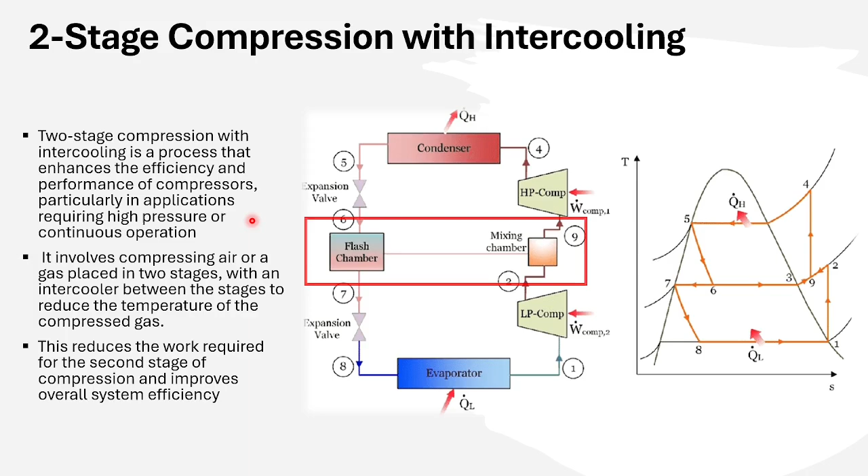So why do we use two-stage compression with intercooling? Here are the key advantages. Number one, increased efficiency. Cooling the gas between the stages means less energy is needed to hit the target pressure, cutting the power costs. Enhanced durability. Lower temperatures reduce wear on compressor parts like pistons and valves, so your system lasts longer.

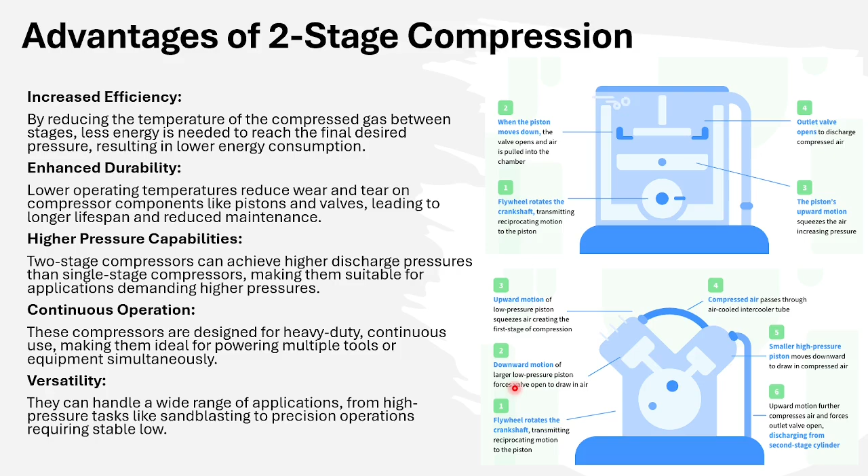Higher pressure capabilities. Two-stage systems handle higher pressures than single-stage systems, perfect for demanding applications. Continuous operation. These compressors are built for heavy-duty non-stop use, like powering multiple tools at once. Versatility. From sandblasting to precision cooling, they handle a wide range of tasks. So these are the benefits that make the two-stage system more efficient and reliable compared to the single-stage system.

The applications of two-stage systems. A two-stage system shines when there is a big pressure difference between the evaporator and the condenser. So here is where you will find it. Low temperature refrigeration. Just think of cold storage warehouses, frozen food plants, or fish and meat processing plants.

Industrial refrigeration. Systems needing evaporator temperatures as low as minus 40 degrees Celsius to minus 80 degrees Celsius, like chemical plants. Gas liquefaction. It is used for ammonia, CO2 or even liquefied natural gas, LNG, for the gas liquefaction process.

Cryogenics. Used for ultra low temperatures where multiple compression stages are required. Large scale HVAC. It's less common now but still used for extreme temperature lifts in big buildings.

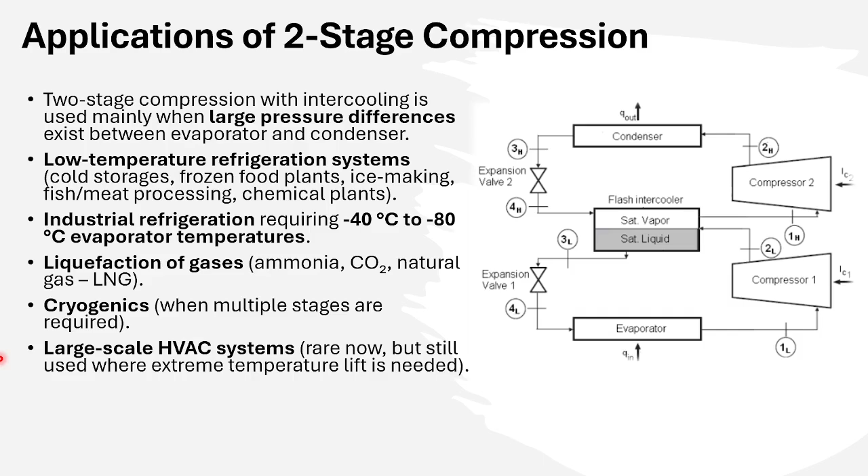So now let's dive into the refrigerants powering these systems. Regulations like the Kigali Amendment are pushing low GWP options. So here's what's trending. Ammonia, the king of industrial systems: it's low cost, super efficient, with zero GWP and no ozone depletion potential. You will find it in food storage and ice plants.

CO2, it's gaining traction in supermarkets and transcritical systems. It is natural, safe, and works great with intercooling setups like parallel compression. Hydrocarbons. R290, R600a, R170, that is propane, butane, and ethane, used for ultra low temperatures like LNG liquefaction. They are efficient but require careful handling due to flammability.

HFOs and blends. R1234yf, R1234ze, and R513A. These low GWP options are popping up in large chillers, improving efficiency in staged systems. So each refrigerant has its strengths, but how do they stack up in performance? Let's see in CycleD-HX.

So now we will move to our simulation software, CycleD-HX. We will open CycleD-HX version 2.0. First we will go to File and Open. Here we are going to open the example files which are already provided by the CycleD-HX simulation software. In the examples at the bottom you will see the refrigeration intercooling example with R32. Just click it and open it.

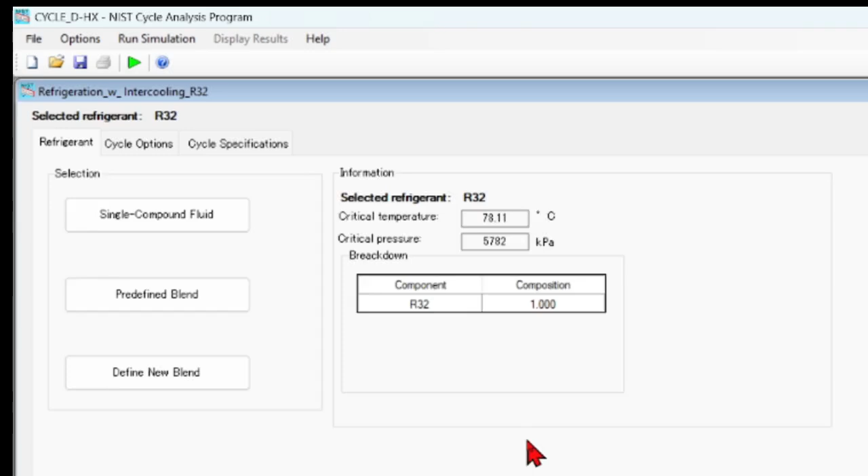This will load the file data, and here you can see it has already selected refrigerant R32. For the cycle option, it has selected two-stage compression with intercooling, and here you can see its diagram. An important thing is that you have to define the intermediate pressure, which is already defined as 13 bar or 1300 kilopascal. This intermediate pressure is a very important parameter for two-stage compression with intercooling,

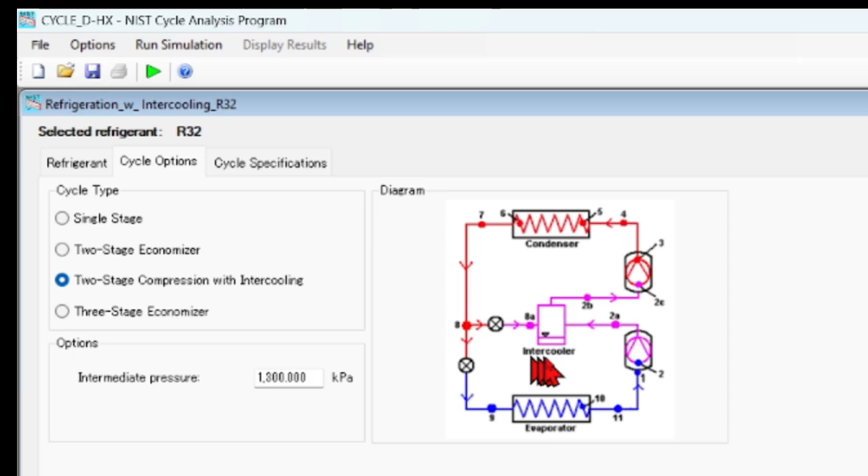because sometimes we vary it to check at which point we have maximum COP. So this is what we will also study in this video. In the cycle option you can see it has already selected the impose mode and delta T mode. First we will check the reference parameters and run it in impose mode so that it will impose all the geometry parameters.

Here we can see that the system cooling capacity is 12 kilowatts, and the vapor line pressure drops are assumed 0. Also the auxiliary power is assumed 0. And both compressors have isentropic, volumetric and electric efficiency of 100%. So now we will run it in impose mode first.

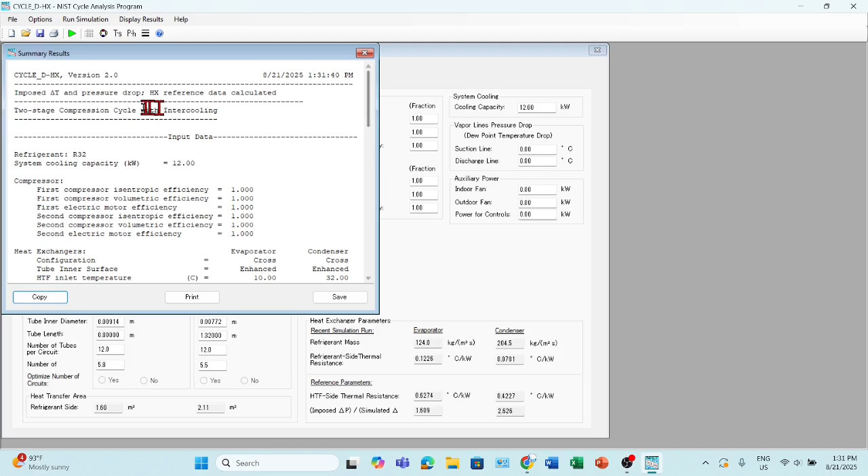Here you can see it has run in impose mode. Now we will move to simulate mode. In impose mode it has saved some reference parameters which it will use for our simulations. And now in simulation you can see some of the boxes are grayed out, which we cannot change. So now we will just run it in simulate mode.

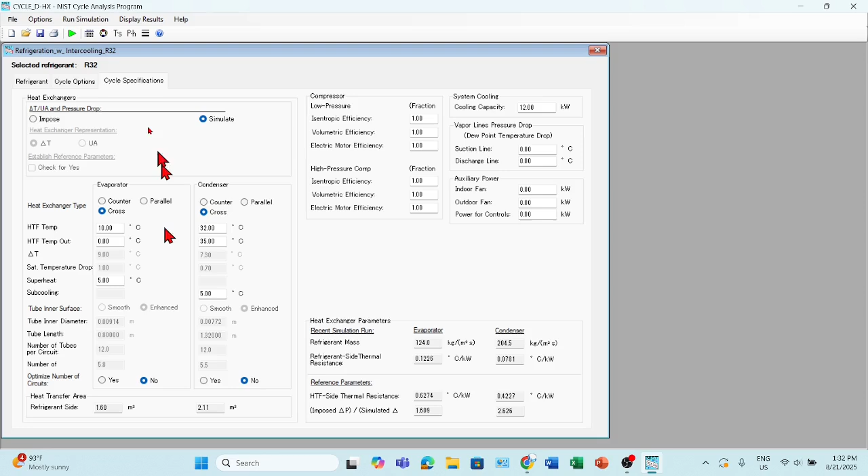So here you can see it has run it in simulate mode. Now what we can see, it has calculated the thermodynamic cycle results at all the state points, and it has calculated the compressor and system results. The important ones are the compressor power and the COP cooling and COP heating values, and also compressor suction volumetric flow rate values. And here we can see the heat exchanger results also.

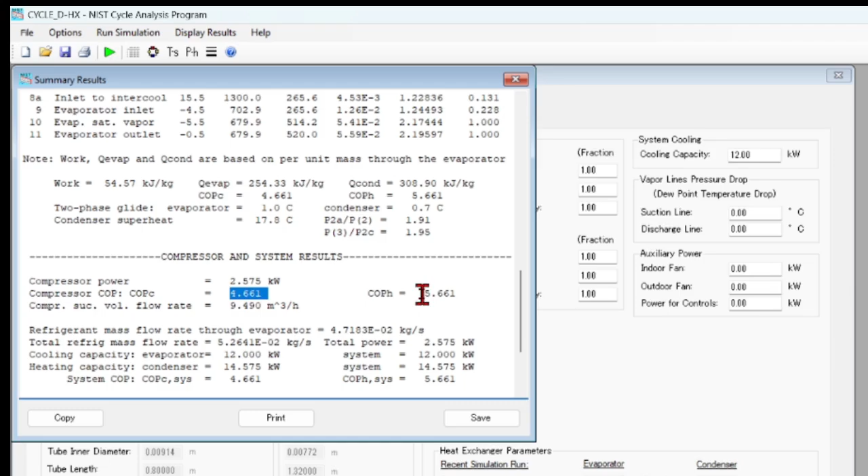So what we will do, we will just see what are the COP values, or can we improve these values or not. For example, here we can see the COP of cooling is 4.661 and COP of heating is 5.661. Now we have to see how we can improve these COP values. For this we will go and check the TS and pH diagrams. So for those diagrams you will just click on the TS and it will open the TS diagram, and then pH, it will open the pH diagram.

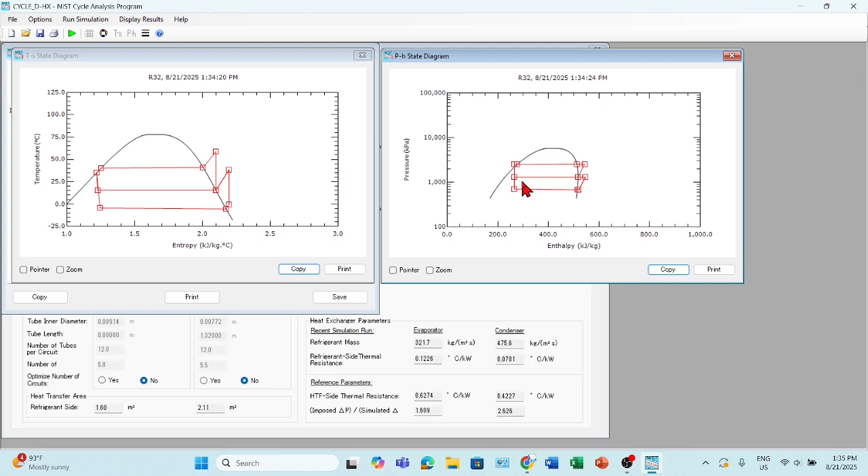So here in this TS and pH diagram you can see clearly that it has equally divided the pressure levels and the temperature levels in the two stages. So it should be the most efficient intermediate pressure points and temperature points. But let's see, while changing these pressure levels, how it affects the COP of the system. So we will just save the results of R32. We will name them R32 two-stage.

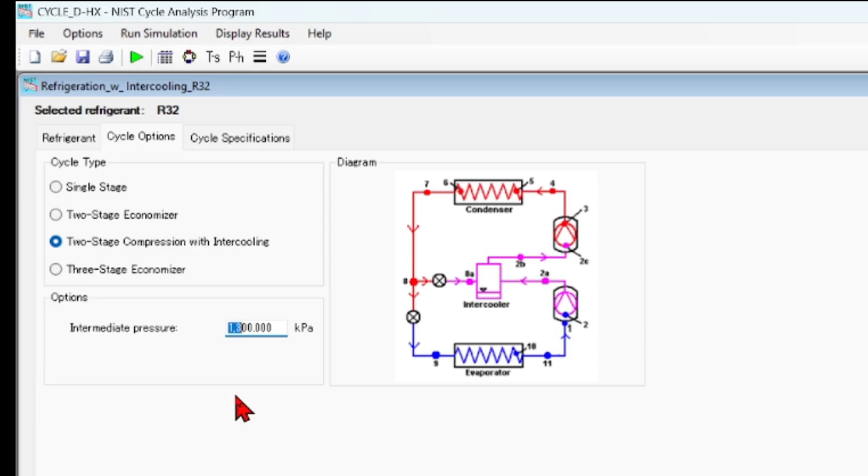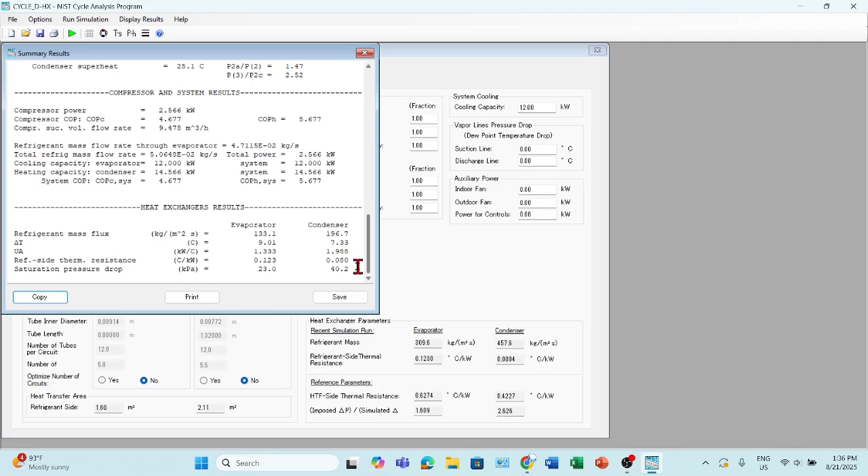Now we will go back to the cycle options, and here we can see that the intermediate pressure is 13 bar or 1300 kilopascal. Now we will just reduce it to 10 bar or 1000 kilopascal, and we will see how it affects our results. We will go back to cycle specification and then we will run this simulation again. Now here we can see the latest results. We will also save this file so that we can compare it with the previous results. We will save it R32 10 bar.

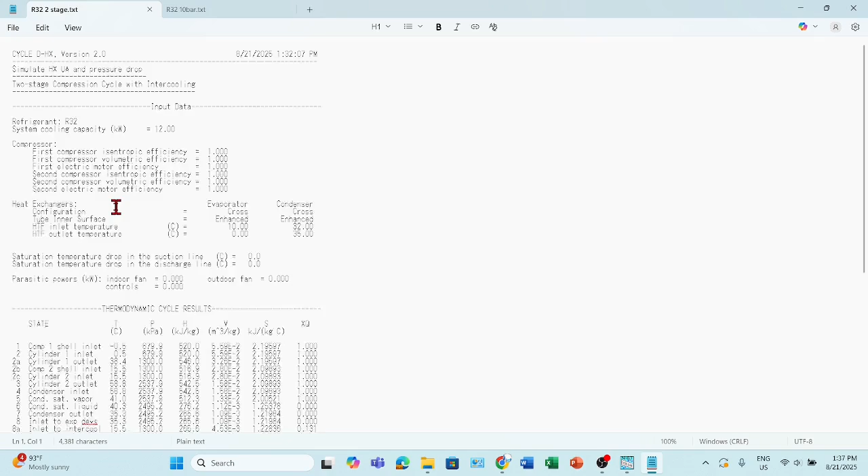Now we will just open and compare these results. So here you can see when we run it at 13 bar, we get the COP cooling of 4.661 and COP heating of 5.661. When we change the pressure to 10 bar and then we run the simulation again, then the COP of cooling is 4.677 and COP heating is 5.677. So you can say that the COP of cooling and COP of heating has improved by decreasing the intermediate pressure.

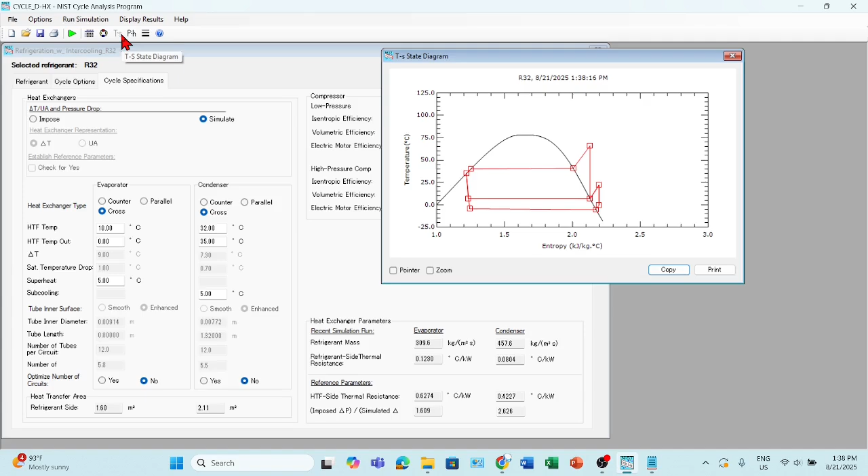So this is how we use the two-stage intercooling compression cycle, and usually we vary this pressure level to get the maximum COP of the system. Here you can see that when running it at 10 bar pressure, it has not divided the two stages equally. We can see that the temperature levels and the pressure levels are not equally divided. This means that on the second stage of the compressor, there is more load as compared to the first stage of the compressor, which is not desirable. So this is how we have to do optimization between the optimum intermediate pressure and COP of the system.

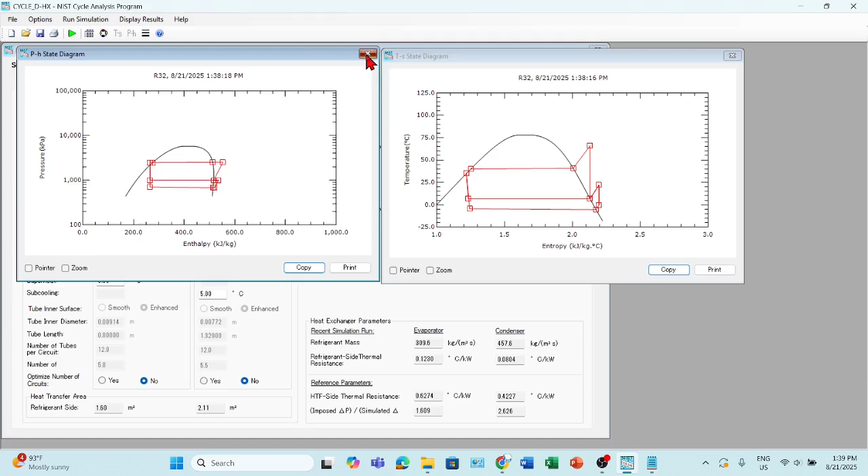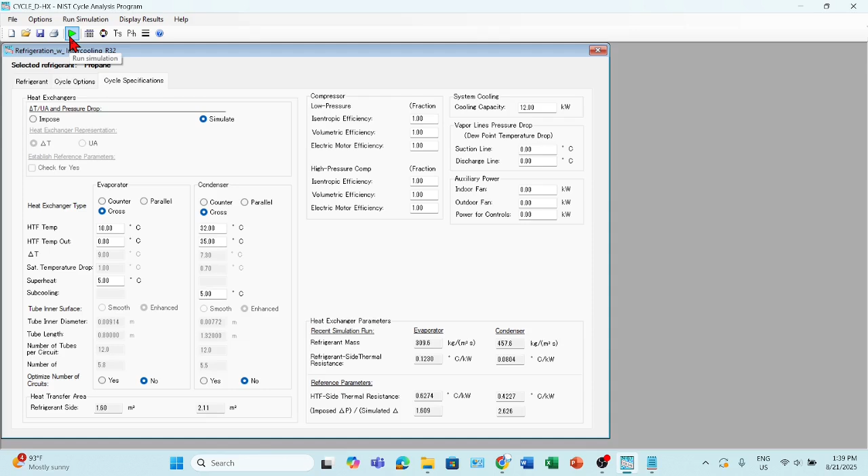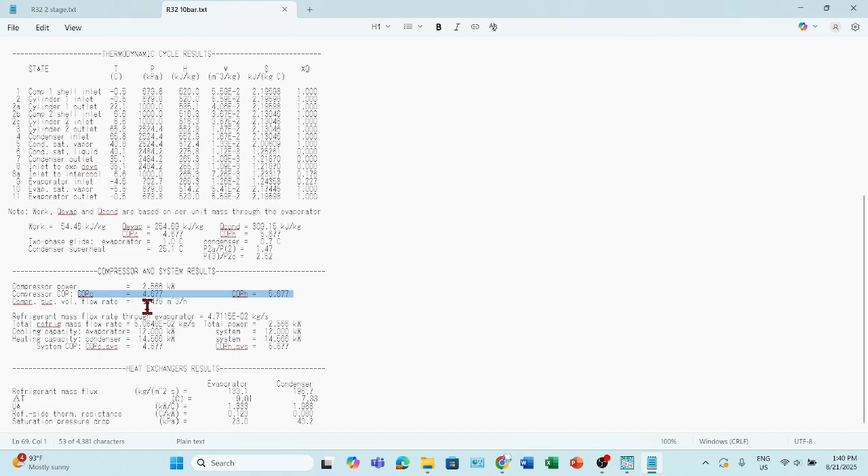What you can do further is that you can also use it for different refrigerants. So you will go back to the refrigerant, you will go to single compound fluid and you will select propane. In the cycle options, you will change the pressure level back to 10 bar or 1000 kilopascal, and then you will run the simulation. In this case, you will get the results for the propane. And for the propane, we can see the COP values. COP cooling is 4.5 and COP heating is 5.5. So as compared to the COP values of R32, we can see that the propane values are lesser than the R32 values. You can also see its TS and pH diagram.

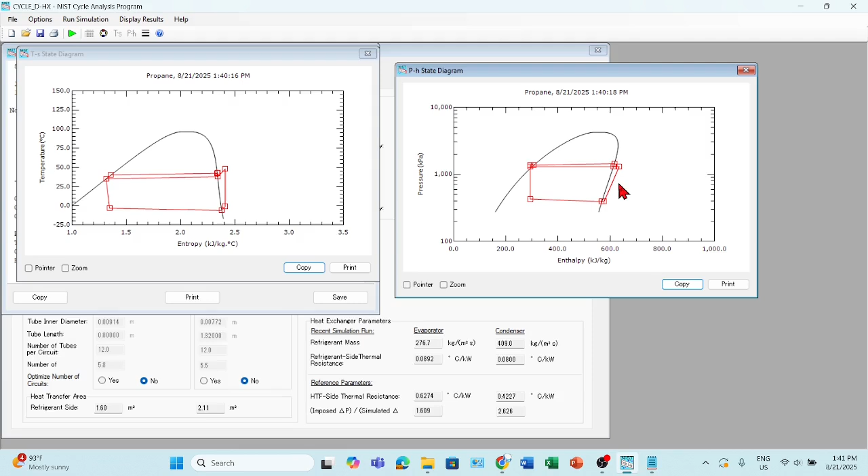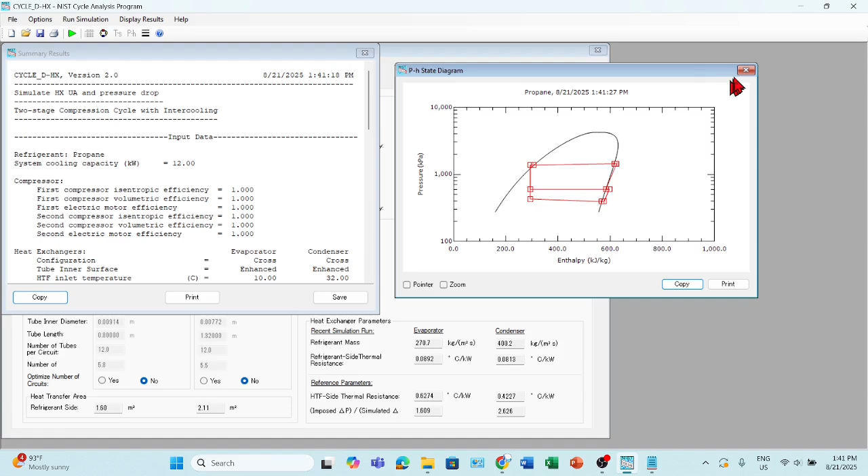And from this diagram, we can learn that the two stages are not equally divided. That is why the propane is not giving us a better COP value. So to improve its efficiency, we will further decrease the intermediate pressure so that it will equally divide the pressures in the two stages, and it will improve the efficiency of the system. So let's go to the cycle option and decrease the pressure. Instead of 10 bar, this time I think we should go for 6 bar, and now we will run it again. So here you can see now it's a little bit divided pressure, but still it needs some amendments. So this is how you can just play with this software and you can get different amazing results.